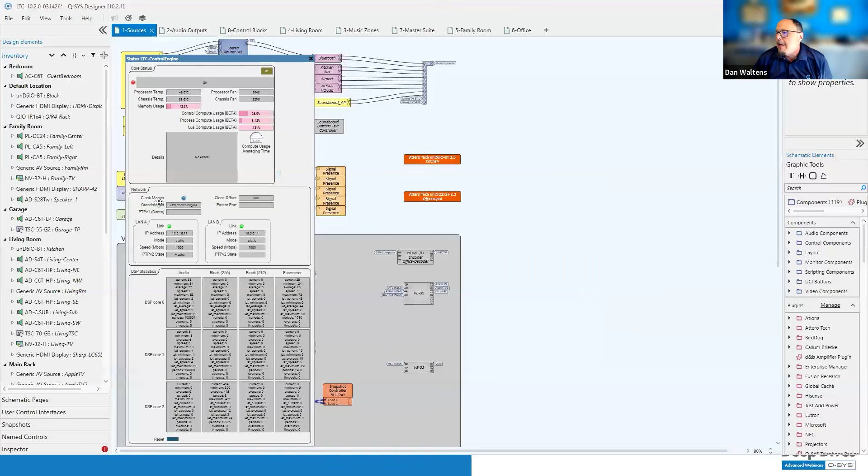All right, yeah, I can. Let me just share this over here. Pull this over. But in here, it's going to tell you who the grandmaster clock is. So let's see if I can, you can click and zoom by hitting scroll in there. So right in here, it's going to tell you what the clock master is. And then the light is going to be lit on if this device is actually the core. So hopefully that helps.

Cool. Thanks, Dan. Yeah. Sorry, I always got long answers. This webinar has few enough slides that we can pause and give deeper answers. So we love a live webinar. Yeah, exactly. There you go.

So scenario 7. Oh my gosh, look at this. Our core has become the boundary clock. So it's going to decipher between V1 and V2. It's going to handle that for us. But what we're going to end up with is the unD6IO-BT is going to be the primary clock leader in this case. So what we want to do is we want to move that. Eventually, we're going to want to move that, and we'll talk about how to do that. So default PTP priority in the core prevents it from winning the BMCA, right? So just as a default, that's where it's at.

So what we want to do here, scenario 8, software-based Dante with a PTP priority. Same kind of scenario. We're going to disable AES67 on these chips, and we're going to look at what we do here. We already know that the core is going to become the boundary clock, and we're going to just go in and set this priority level to something below 127. This slide looks a lot like the last one.

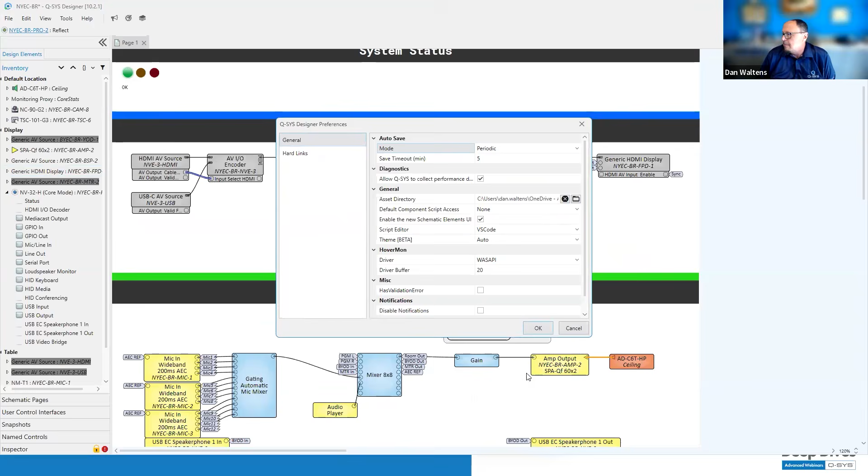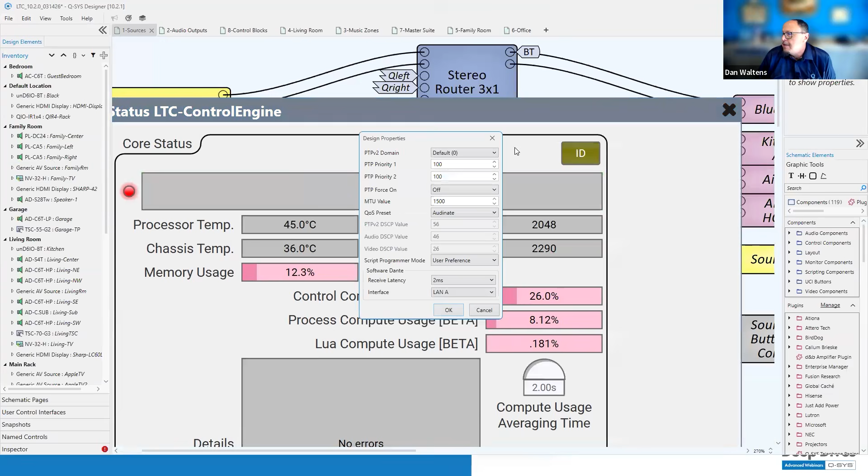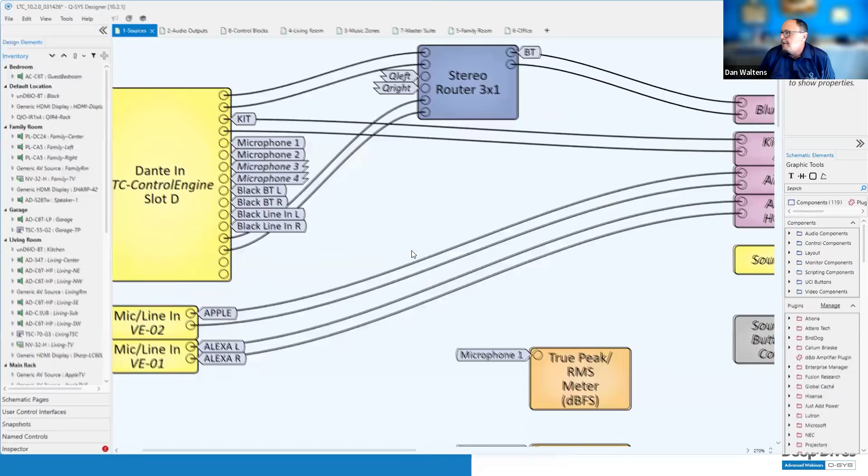Let me just bring that core back in here. It'll be easier to see what we're doing. Oh, this is a live one. I need one that's off. Cancel. Let's grab this one. We want one that's not online. So if we go down here and we go to File and we do Design Properties, you'll see here, let me close this out and get us to a blank part where you guys can see that. Whoops. Boy, oh boy, I really need someone that knows how to use a computer around here. All right, let's scroll down here. There we go. Get some better contrast on this.

So I can't zoom in and make this any bigger, but by default, this is set to Audinate. And if you change that to Q-LAN, you'll notice that the PTP timing packets are going to be given a priority of 46, 34 for audio DSCP value, and then video 26. But Dante sets its devices so that the PTP v2 is 56. So it has a higher priority.

So anytime you're on a network with Dante, you're going to want to set this. Like for instance, our training desks in the Experience Center, they don't have any Dante on them, but we have them all set for Audinate because they're living on a network where Dante is being translated as well.

Then there is an option here of manual, and that's if you're in some unique situation. I've heard of it maybe on cruise ships where they're sharing one huge combined network and there's radar timing and all kinds of other things. This gives you the ability to manually tweak that.

But by default, if this core is not on a network with a bunch of other cores, or with any Dante devices, leave it at Q-LAN. If there's any Dante devices on that same network, do that there. So hopefully that clears that up and we'll move on. That's one thing that's important there.

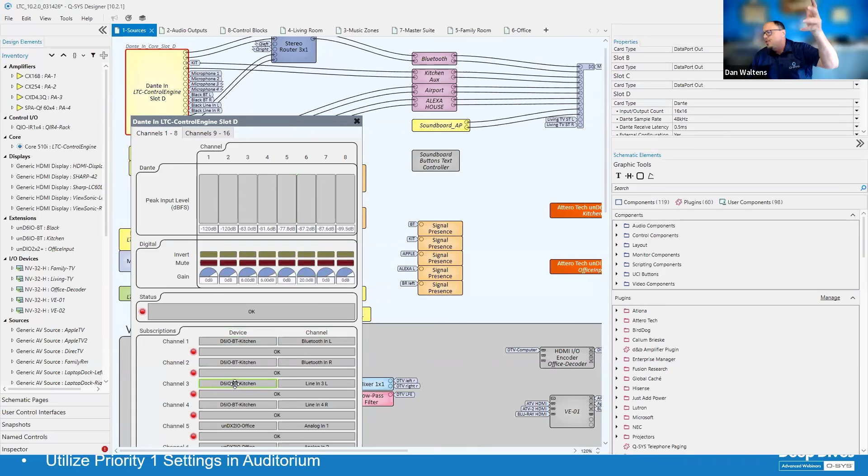So I think what the question is asking is on the input side, the receiver coming in Dante, we have the ability in here to set the block up to where you can do external configuration here. You can choose what Dante streams you're receiving, right? But when you go to the Dante outputs, there is no way to choose that. We don't give you that ability because this is just outputting audio. So the receiving device would want to do it.

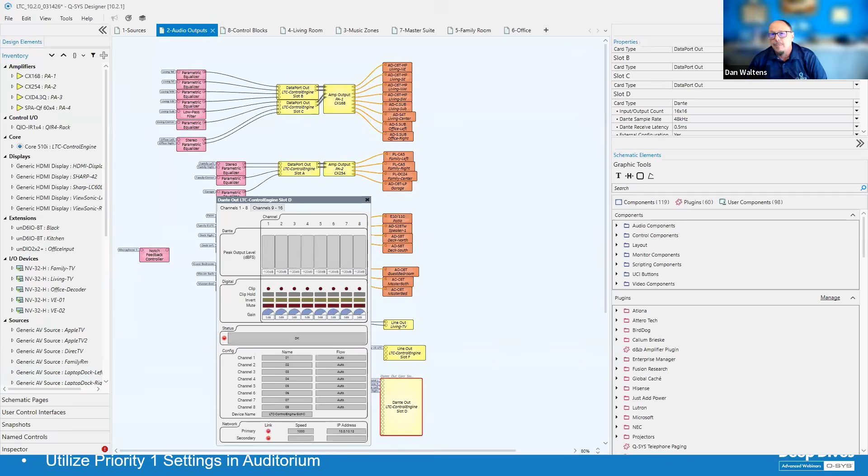So to kind of answer the question there, I guess the intent was that you wouldn't know where you want a source to go. That's more a property of a receiver in the system, would be the way I would think there.

So let's see, I can't get there. It popped out. Let me pop the questions back up here again. A couple left. We're getting there. Yeah, you're burning through them. Thanks for sticking around.

All right. How many of these domains does Q-SYS offer? So without using Dante Domain Manager, you would only get domain 0. So you'd have to go in and change that using Dante Domain Manager. But unless you're talking about domains just in Q-SYS itself, let's see. Like we said, the design property default domain is 0, you have alt 1, 2, 3, and then you can go all the way up to 127 different PTP v2 domains that can be used there. And that's in the design properties section.

All right. Which end of software-based Dante establishes the clock, transmit or receive? If I have a multi-core Q-SYS system and I want a master processor to be the PTP clock leader, but it doesn't actually have any Dante traffic in or out of this core, do I need to include a TX or RX or both in order to establish it as the clock leader?